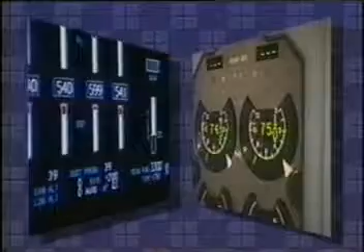The reliability of the gas turbine engine has reached a level where severe engine failure is so unlikely that most pilots will never experience one in their flying career. However, modern turbine engines can still fail. And when they fail, whether with a loud bang and high vibration or just quietly decay to zero thrust, the pilot is expected to recognize the specific engine problem and then to take appropriate action.

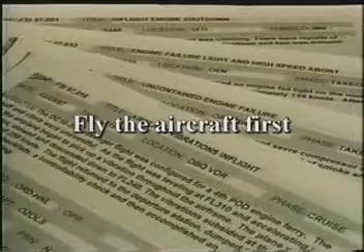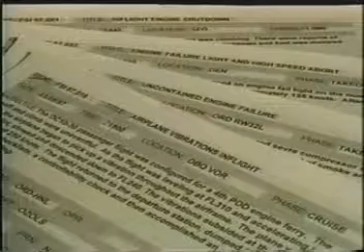Over the last several years, data has indicated some pilots have attempted to diagnose aircraft malfunctions prior to establishing control of the aircraft. This has occurred despite the fact that all pilots are taught to fly the aircraft first. So why does the data indicate that they have not done this? One of the main reasons is the startle factor. Because of modern aircraft's high reliability, when a malfunction occurs, it is frequently the first time the flight crew is exposed to the true sensations of that malfunction.

While simulators have greatly improved pilot training, they've not always realistically simulated the actual noise, vibration, and aerodynamic forces certain engine malfunctions cause. It also appears that the greater the physical sensations the pilot feels during the malfunction, the greater the startle factor. And the greater the likelihood the flight crew will try to diagnose the problem immediately instead of flying the aircraft first.

When flight crews are interviewed after engine malfunction events, such as the surge of a large high-bypass engine during initial climb-out, they make very similar comments regarding the event. Pilots will often report that it felt like a bomb went off, or that the aircraft was falling apart. Each time an event occurred, the sound and the feel of the event were different, and often much more intense than indicated by any training the crews had received.

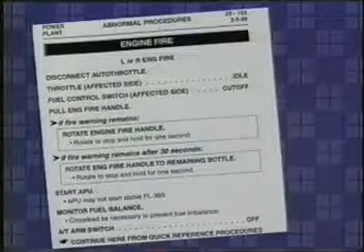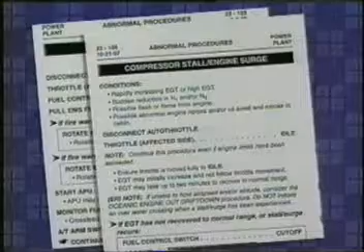Because of this, the flight crew either did not recognize the engine symptom or was so concerned about the engine that they responded without taking time to correctly evaluate the situation. In each case, additional time spent in stabilizing the airplane's flight path before responding to the engine symptom would have avoided a serious event.

Remember, all transport category aircraft are designed and certified to be controllable with the most critical engine failed. Unlike early turboprops, turbofan-powered airplanes do not require immediate pilot action to the engine in the event of a single engine malfunction or failure. Once the flight path is stabilized, the engine malfunction may be safely identified and the appropriate checklists executed. Taking the time to stabilize the flight path may sometimes lead to further engine damage, but despite that, the airplane still has the capability of safe flight.

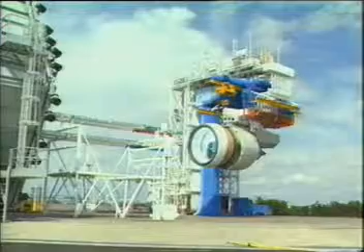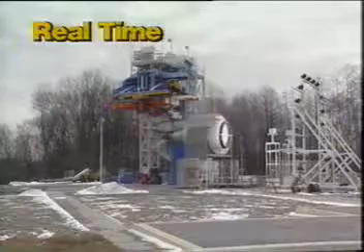Engines are tested during initial certification to demonstrate ruggedness following bird and ice ingestion. Even after a major failure, such as the loss of an entire fan blade, which is an extremely rare event, the engine shuts down safely and the airplane is still airworthy. Service history of fleet aircraft verifies that there are generally no engine failures requiring an instant engine shutdown in order to maintain airplane safety, and that continuing a takeoff after an engine failure at V1 is safer than rejecting the takeoff. So, the capability to recognize turbine engine malfunctions must be learned.

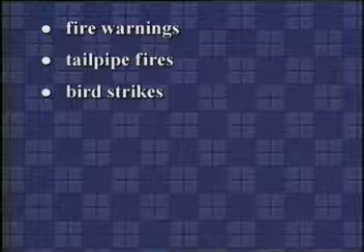But how? The objective of this video is to provide pilots with information to help them recognize and identify various engine malfunctions that have led to inappropriate crew responses and accidents in the past. These malfunctions include fire warnings, tailpipe fires, bird strikes, vibration, engine surge, severe engine damage, and slow power loss. In each case, the first priority is to employ the basic stick and rudder inputs necessary to maintain aerodynamic control of the aircraft. Remember, fly the airplane and then identify and respond to the engine malfunction when time permits.

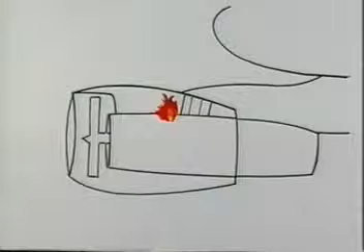Fire warnings result from excessively high temperature in the space between the engine casings and cowling or from fire detection system malfunctions. The heat source may be an actual fire around the engine, an engine failure allowing core air to escape through a hole in the casings, or a leak of hot air from a bleed duct. Whenever a fire warning occurs, the first priority must be to fly the airplane. Once the airplane is stabilized, attention should then be directed toward execution of the appropriate checklist.

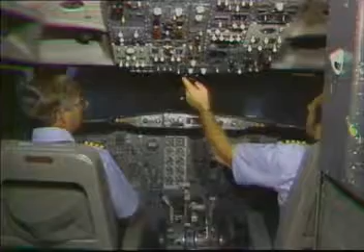Even if there is an actual fire, there is adequate isolation between the airplane structure and the nacelle to ensure sufficient time to establish and maintain airplane control to a safe altitude. Taking this time may cause further fire damage within the nacelle, but accident reports consistently show that flight path control must be focused on first, and it must remain a high priority until landing.

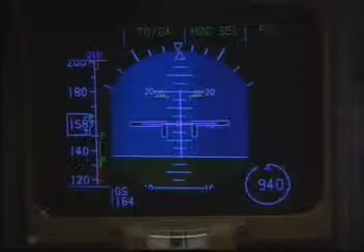Engine torching, or tailpipe fires, mostly occur during an abnormal engine start, but they may also occur after shutdown or during other ground operations. Although there may be no cockpit engine instrument indication, these events can be very spectacular when viewed from the ramp or cabin, and have been confused with an actual engine fire. The torching may be of short duration or it may last for several seconds. Note that the flame is confined to the tailpipe.

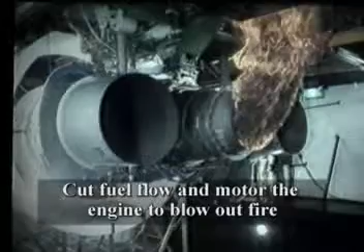Flames may turn upward and threaten the wing if no airflow is maintained through the engine, and in some cases, an EGT increase may be indicated on the flight deck. Simply cutting fuel flow while continuing to motor the engine normally extinguishes the flames. The flight crew depends on ground personnel to identify engine torching.

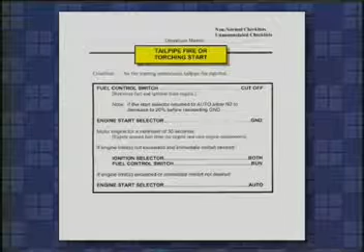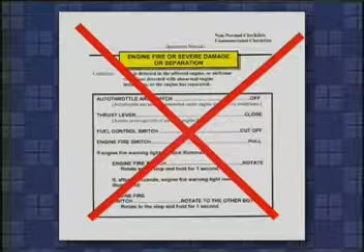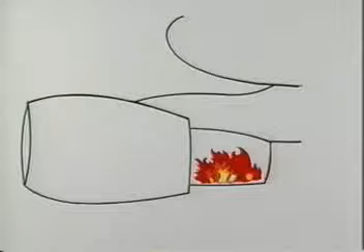If you are told of an engine fire without any flight deck indications of a fire, follow the engine torching procedure as outlined in your flight manual. This procedure will direct you to motor the engine and extinguish the flames. The regular fire procedure will not. Do not perform the engine fire procedure unless a fire warning indication occurs. Executing the regular fire procedure may disable bleed air to the engine starter and prevent you from being able to motor the engine to blow out the tailpipe fire.

There have been cases where flight attendants or passengers have initiated evacuations due to engine torching. These unnecessary evacuations can be minimized by prompt flight deck and cabin crew coordination to provide passengers with pertinent information and to alleviate their concerns.

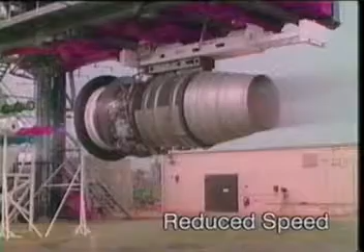Bird strike is a concern for every pilot. The birds may be observed by the flight crew, or the first indication of a bird ingestion may be an engine surge. Flocking birds are a particular concern since they can affect more than one engine. It may be difficult to see the birds and to know how many engines have ingested birds.

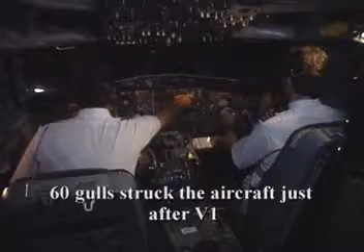V1, rotate. Birds. I check the birds. Come on, baby, keep flying. Keep going now. Keep flying. Positive rate. Yeah. Come on, baby, that's it. Nice job. Keep flying the airplane. There's 400 feet. Okay, what's the problem?

Most bird strikes occur close to the ground, at the very time when there is least opportunity to appraise the situation. Nevertheless, the record shows that establishing flight path control first before taking action on the engine is a more successful strategy than taking immediate action with the engine. There have been accidents resulting from bird strike-related rejected takeoffs above V1 speed, and in each case, the airplane was in fact safe to fly. Therefore, rejecting a takeoff due to a bird strike at speeds above V1 is not considered to be appropriate.

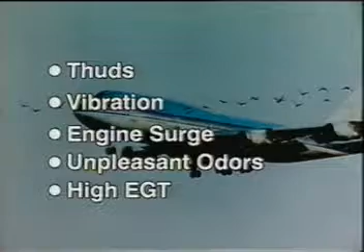Bird ingestion by an engine may be accompanied by audible thuds, vibration, engine surge, unpleasant odors, and abnormal engine instrument readings such as high EGT. Throttling back an engine may be needed to clear a stall after the airplane has been placed on a stable flight path. If the engine involved cannot be positively identified, do not shut it down. In the unlikely event of multiple engines surging, prompt action may be required to clear the stall on the engines one at a time to assure that some power is available later.

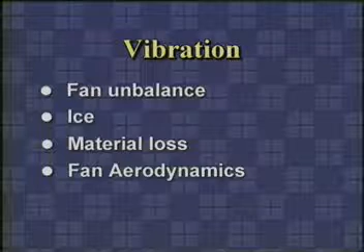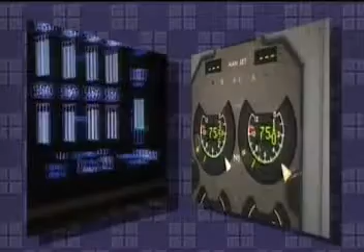Engine vibration may be caused by a fan unbalance. This can come from ice buildup. It may also come from fan blade material loss or aerodynamic excitation from blade distortion due to foreign object damage. Vibration can also come from internal engine failure such as a bearing failure. Cross-reference of all engine parameters will help to establish whether an engine failure actually exists. Engine-induced vibration felt on the flight deck may not be indicated on instruments.

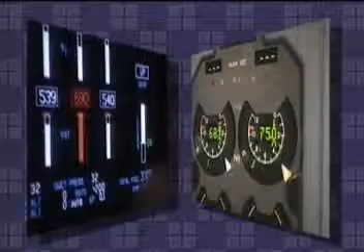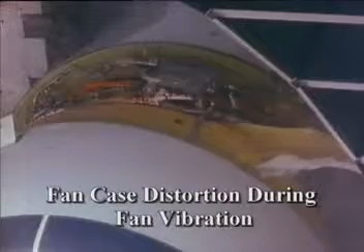For some engine failures, severe vibration may be experienced after the engine has been shut down to the point where instruments are difficult to read. This vibration is caused by the unbalanced fan, windmilling at an engine speed close to an airframe's natural frequency, which amplifies the vibration. Changing airspeed and/or altitude will change the fan windmill speed, and an airplane speed may be found where there will be much less vibration. There is no risk of an airplane structural failure due to vibratory engine loads during this windmilling action.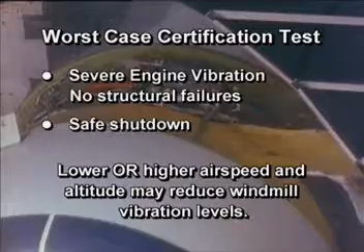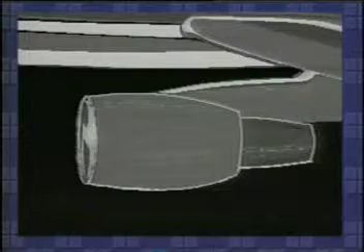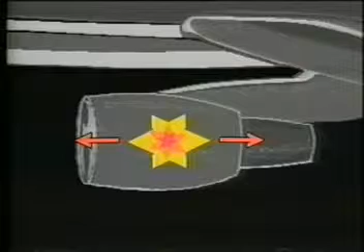From a flight crew member's perspective, one of the most startling events is the engine surge or stall on takeoff or during flight. An engine surge is, in the simplest terms, the breakdown of the airflow in a turbine engine. When the compressor blades stall, they are no longer able to force the air through the engine from front to rear. Now the high-pressure air in the middle of the engine can escape explosively from front and back simultaneously.

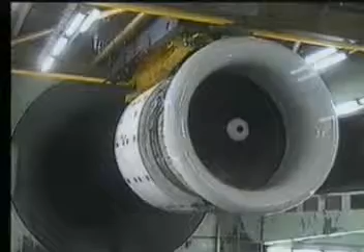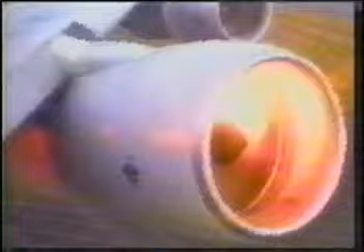Usually there are visible flames from both ends of the engine, accompanied with one or more very loud bangs. This violent airflow reversal will produce an instant loss of thrust and an immediate yaw that will literally spill most of the coffee from your cup. This yaw is accompanied by a vibration that cannot be duplicated in the simulator.

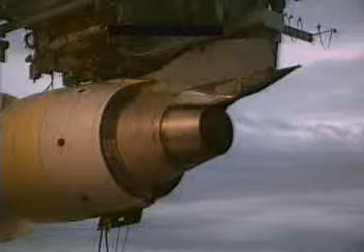Bird strikes, internal engine failures, engine pneumatic bleed malfunctions, or internal engine clearance changes can cause a surge. It is usually a problem in the compressor system and so is often referred to as a compressor surge or compressor stall. The magnitude of the symptoms, such as the loudness of the noise and the severity of the vibration, vary with the power setting and the type of instability in the compression system. Low altitude and high power settings produce the loudest bangs and the most violent yaw and vibration.

High altitude surges are frequently associated with engine power changes during leveling off or when initiating an altitude change. High altitude surges generally result in a muffled noise, light vibration, and increasing EGT, and may require power reduction to clear the condition. Some surges allow the engine to recover with no flight crew action. Others recover after flight crew action to reduce power. The most severe surges are non-recoverable. When the engine recovers by itself, it is best to just fly the airplane and not interfere with the engine.

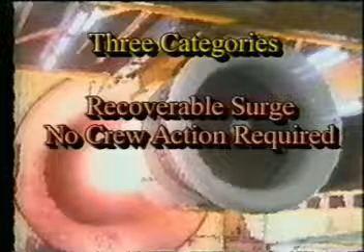Identification of a recoverable compressor surge or stall condition based on engine parameter fluctuations or changes alone can be difficult, due in part to the fact that the event is usually over in the blink of an eye. Generally, most flight crews identify the condition as an engine malfunction when the EGT exceeds its limits or the EGT gauge turns red. If EGT continues to rise following a surge, the thrust lever should be retarded to allow the engine to recover. Then, after the engine recovers, power should be reapplied slowly.

If the engine does not stall again when the power lever is re-advanced, the power can be left high. If the engine stalls again with the reapplication of power lever input, the power setting may need to be left at a lower power or idle condition. Continue to fly the airplane to ensure the indications return to normal.

If the engine does not recover or the EGT remains out of limits, then a shutdown of the engine may be the logical choice depending on the operational situation. Your flight manual and checklists identify the specific procedures to follow. Remember that an engine at idle still provides power for airplane systems and creates less drag than if shut down.

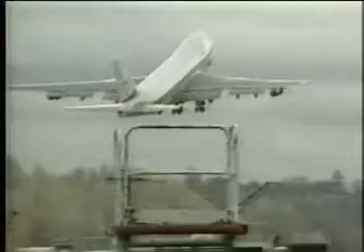There have been numerous occasions where a high-power compressor surge has occurred during the takeoff roll or initial climb-out, and the flight crew was notified by the tower that an engine was on fire. As a result, the flight crews accomplished the engine fire checklist and shut down the engine, even though there was no fire warning annunciated in the cockpit. The tower saw fire out the inlet and tailpipe, and their information regarding seeing flames outside the engine was correct, but an engine shutdown was not necessary since this was not actually an aircraft fire.

While the likelihood of high-power engine surge is rare, the startle factor associated with loud bangs and airplane vibration has led to instances of inappropriate action such as rejecting the takeoff after the V1 speed, shutting down the wrong engine, improperly executing the failure climb profile, or failing to comply with established ground tracks to clear rising terrain. Only take action to address the surge after stabilizing the flight path.

Recent interviews with pilots who have experienced high-power compressor surge malfunctions during takeoff and initial climb have revealed that they have initially thought that a bomb had exploded, or that they hit a truck, or had a mid-air collision. Remember, no matter how loud the bang, airplane control is always the first priority.

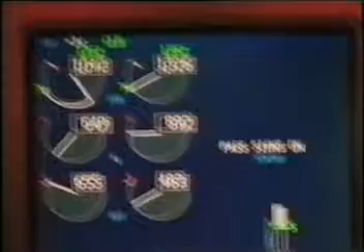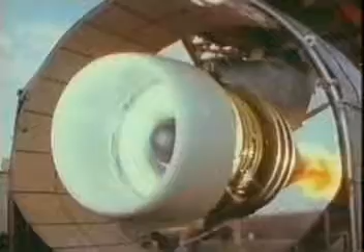In the event of a major internal engine failure resulting in severe engine damage, there may be a variety of symptoms on the flight deck: fire warnings, engine surge, vibration, high EGT, fluctuating RPM, oil system parameters out of limits, and thrust loss.

Any one of these symptoms alone could be from a more benign malfunction, but multiple symptoms are a good indication of severe engine damage, and visual inspection by the cabin crew can be very helpful in confirming this. Visual symptoms may include flames, smoke, or visual damage to engine cowlings.

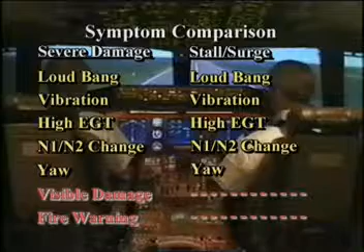It may not be possible to distinguish initially between an engine surge without damage and one accompanying severe damage. The symptoms of the two kinds of events can be very similar, and from an operational standpoint, it is not important to know immediately which of the two has occurred. If it does become necessary to shut down the engine, wait until you positively identify the engine you select as actually being the malfunctioning engine.

It should be noted that even an engine which may show signs of visible damage and visible flames may very well be producing useful power necessary for initial climb out. Again, the first priority is to fly the airplane, not the engine. After you have positive control of the aircraft's flight path, then identify and secure the affected engine when time permits. Diagnosis of exactly what caused the engine problem is neither necessary nor safe if it diverts resources from flying the airplane.

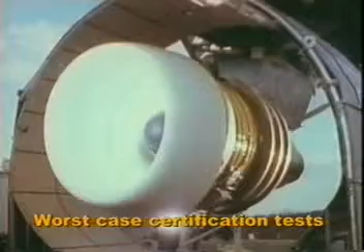The malfunctions discussed so far have compelling cues, such as loud bangs, vibration, and warning or advisory messages. In each case, the challenge is to fly the airplane without being distracted by very compelling or alarming engine symptoms. The last type of malfunction to be discussed here is more subtle: slow decay of thrust, or non-response to power lever. These can be subtle in fact to the point that it can be completely overlooked, with potentially serious consequences to the airplane.

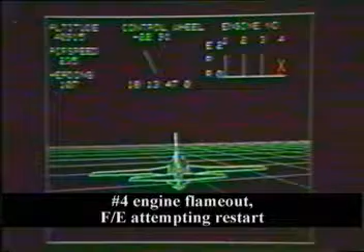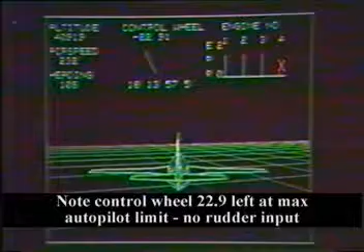If an engine slowly reduces power, or when the thrust lever is moved the engine does not respond, then the airplane will experience asymmetric thrust. The problems will most likely develop at a point during the flight when the autopilot is engaged. The autopilot will compensate for the asymmetrical thrust on its own. It takes an alert flight crew to recognize the situation that's developing.

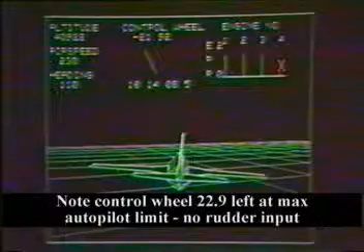If the airplane is badly mistrimmed when the autopilot is manually disconnected, or when the autopilot reaches the limits of its authority and automatically disconnects, only seconds remain before an unusual attitude is encountered. If no external visual references are available, such as flying over the water at night or in IMC, the likelihood of an upset increases. This condition of low-power engine loss with the autopilot on has caused several aircraft upsets, which were not always recoverable. Flight control displacement or trim input indicators may be the only obvious indication that the autopilot is trimming the aircraft away from coordinated flight.

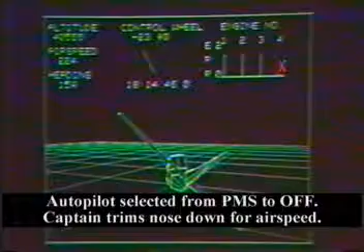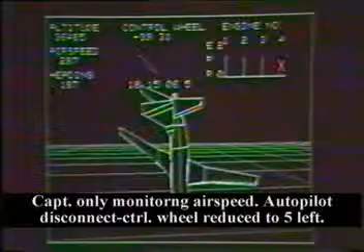Vigilance is required to detect these stealthy engine malfunctions and to maintain a safe flight attitude while the situation is still recoverable. But a slowly changing asymmetric thrust problem is not an easy one to detect. Symptoms may include multiple system problems such as generators dropping offline, low engine oil pressure, unexplained airplane attitude changes, and significant differences between primary parameters from one engine to the next.

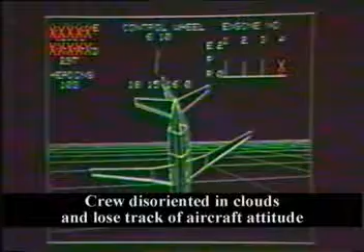If asymmetric thrust is suspected, the pilot must be prepared to make immediate rudder or trim inputs to avoid an uncommanded aircraft roll. The first response must be to make the appropriate rudder input or trim adjustment. Disconnecting the autopilot without appropriate control input or trim adjustments may result in a rapid roll maneuver.

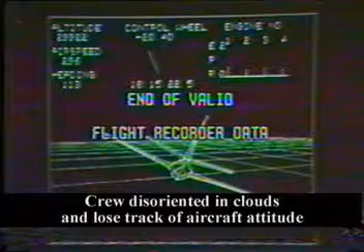Different aircraft from different airframe manufacturers display different types of indicators to the pilot regarding the amount of trim the autopilot may be adding to the system. Consult your flight manual and training department to gain a full understanding of how your particular aircraft provides visual, audible, or tactile indications of the amount of trim being added by the autopilot.

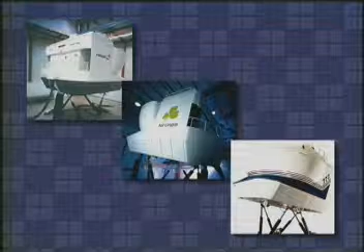The sequence of events and severity of symptoms experienced during an engine malfunction may vary from the events shown in this video and from those experienced in a simulator. Engine malfunctions vary from one event to the next. The failures shown here were selected as relatively severe, but not the most severe that have ever occurred. Simulation of failures may be limited by simulator capability, which may not permit realistic levels of noise and vibration symptoms. Industry is currently addressing these concerns to enhance the simulation realism for such failures.

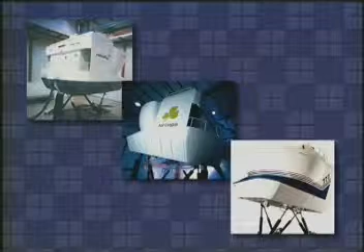This video is intended to provide general information on the characteristics of some high bypass engine failures and malfunctions. It is not intended to be an in-depth study of all possible engine failure modes. Specific remedial action to be taken in the event of an engine failure is published in the Airplane Flight or Operating Manual.